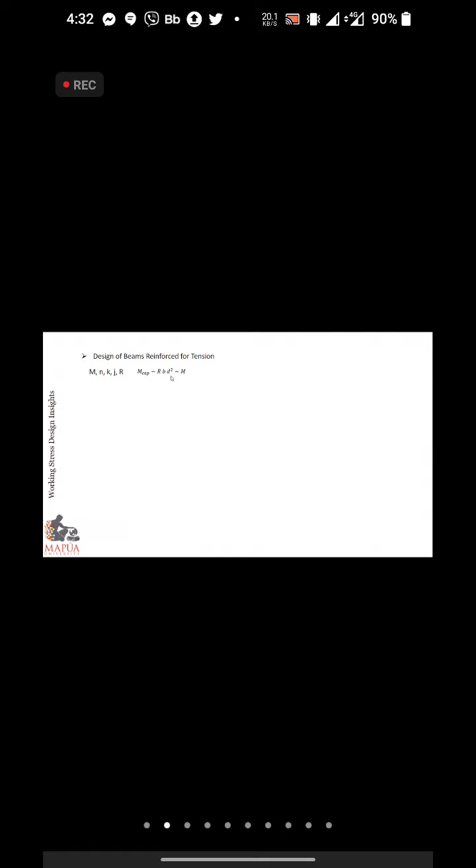Those laid out parameters can be computed as one single coefficient or constant R. And then we set a particular value for B as a function of D, or D as a function of B, with a guiding ideal ratio of 1/2 to 2/3.

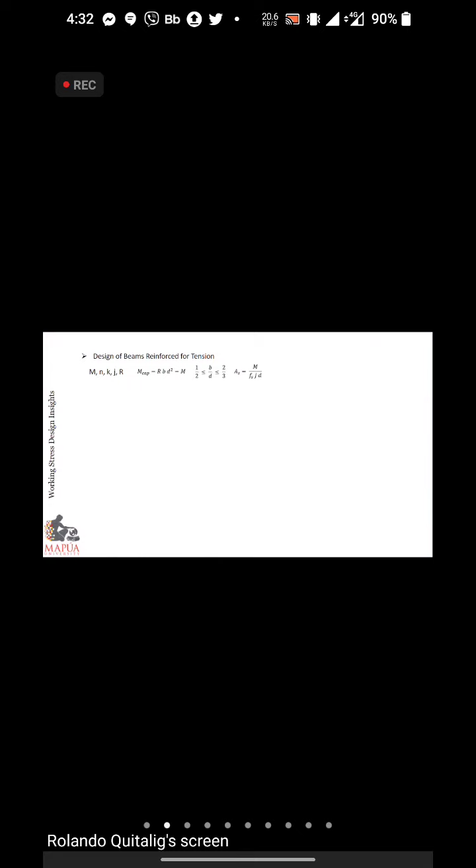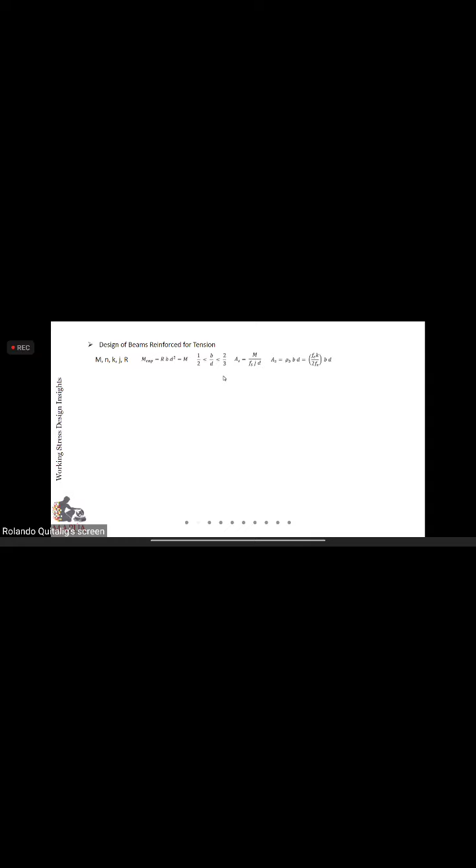Then after that, we compute for the AS, the tensile requirement for this design, singly reinforced, which is equal to M over FSJD. And then we can also obtain the magnitude considering the balance steel ratio multiplied by BD, that computed dimension. And as a function of the compressive strength of concrete, that would be FCK over 2FS BD.

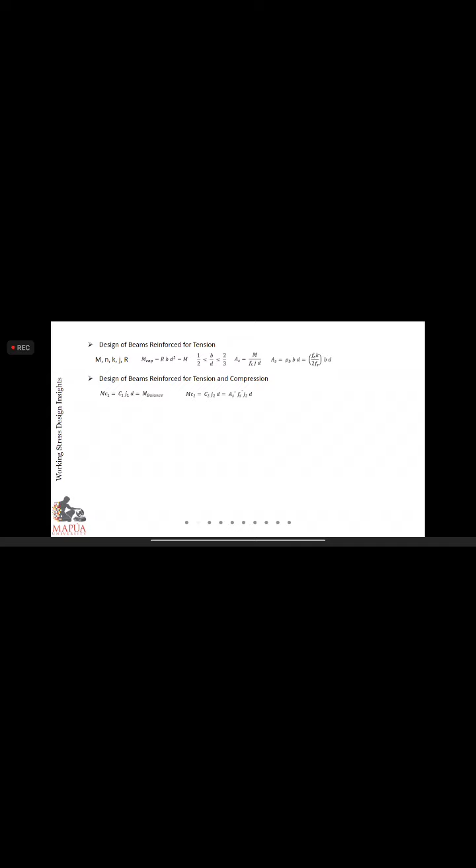And then if we are dealing with design of beams reinforced for tension and compression, we start with the balance moment, which is C1J1D as MC1, and C2J2D as MC2, or set as the compression bars. So that will be AS prime FS double prime for C2 and J2D.

We can compute for the excess moment by virtue of taking the difference of the service moment and the balance moment. We divide it by Fs double prime J2D. We know that there are conditions to be set in Fs double prime as a function of FCS prime, as actual compressive stress of the compression bars.

And then also for the tension area, we have MT1, AS1, FSJ1D as a balance moment. And then for AS2, FSJ2D will be set as MT2. Then the difference of the service moment and the balance moment is the excess moment to be imputed in the calculation of AS2, and this must be divided by FSJ2D.

And then the balance, I mean the AS1, can be computed based on this simple formula, M balance taken from this one, divided by the FSJ1D. And then we take the sum of these two AS, so we have this as total tension reinforcement needed at the tension area.

And then we decide the stirrups, the web reinforcement. In designing the stirrups, we need to find out the actual shear at the distance, and then we compute for the actual shear stress, and compare it with the allowable 0.09 square root of FC prime.

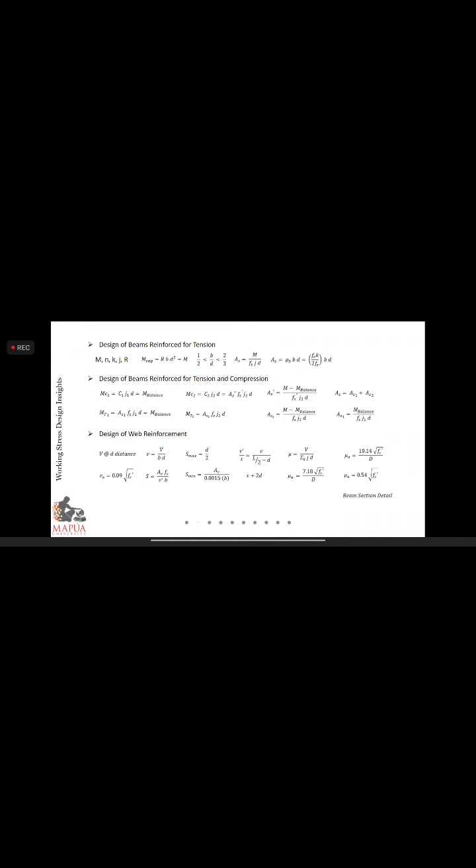We have this already, but I'd like to make an emphasis about the development length. With this development length, we can anchor the idea from the point of zero moment or the inflection point, where the concavity changes. So this will be the center line as indicated here.

From here, we have this set up, whichever is greatest among these three: D, 12 dB, or LN over 16. With this magnitude, we can say that this will be LD minus whatever governing value here, so there will be a magnitude right here.

In a similar manner, whether D or 12 dB, whichever is greater, we consider that and take the difference of it and the LD, then we have a magnitude for this one. From this point to this point to this point, we have a representation of that distance, and then we can compute for the point of zero moment.

By virtue of that magnitude, we can solve for the development length. We are also reminded that we can extend it about 6 inches if that would be continuous. If this terminates on both sides already and there is no continuity, there must be a 12 bend here, right here, and on the other side.

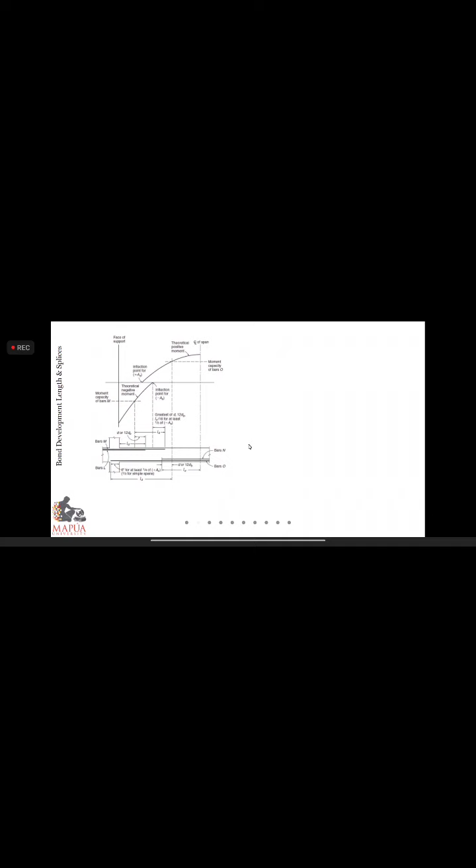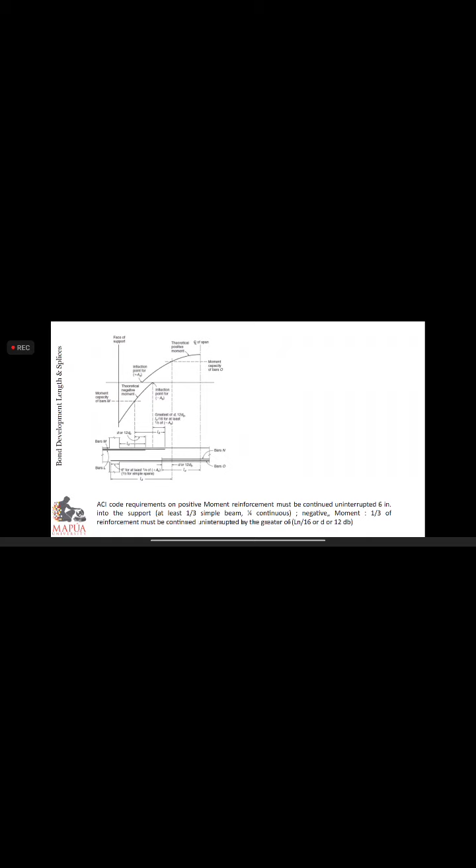This is per the ACI code requirements: positive moment reinforcement must be continued uninterrupted at least 6 inches into the support, at least one-third for simple beams, one-fourth for continuous. For negative moment, one-third of reinforcement must be continued uninterrupted by the greater of ln over 16, or the clear span over 16, or d, or 12 db. This has been manifested in this setup.

So for the development length, that includes the points of inflection and the center line here. I'd just like us to take as a learning discernment that the development length plays an important role in placing the main bars.

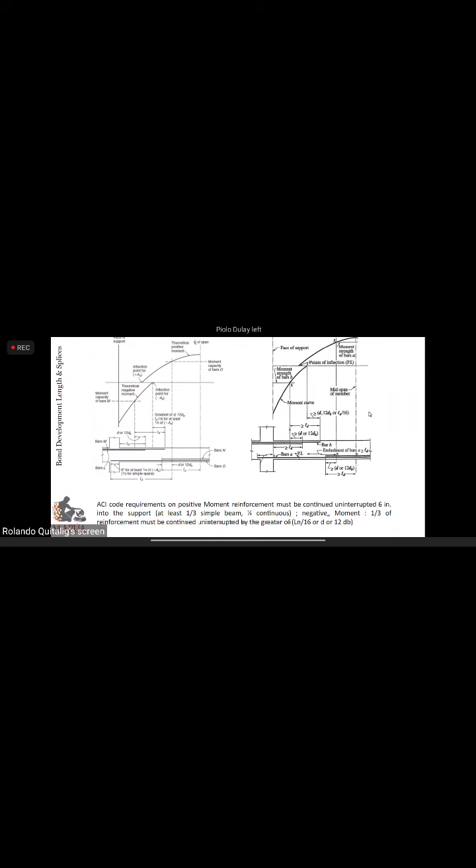Actually, this LD, among other development lengths, has been generalized as this one if you're dealing with continuous beams. So instead of considering the value for the development length, we can generally consider it as L1 over 4 for this first span. This will be over 3, and over 3 as well.

Meaning if you are dealing with an exterior support, that will be over 4. For interior supports, we are going to divide it by 3. So this will be the presentation or positioning of the main bars if you're dealing with negative moment, for the exterior and for the interior.

So the cutting list must be presented just like this one. And also for the positive moment being presented as extra bars, we can have this one. In a while, we are going to discuss to what extent we are going to cut the remaining extra bars. But at this point, let us understand first that this must be placed directly, it must be continued here.

So if, for example, you lack that particular length needed — you are dealing with a 7.5 meter length beam and the commercial size is 6 meters — well, you need to splice that accordingly, based on the recommended splice length of our National Structural Code.

Also, aside from using it continuously, you can employ a crank bar — you can bend it up accordingly. Based on the bending situation here, in this case, that is about 1/4 of the span here, and 1/7 of the span here for bending it up, if you want it to be continuous. As you notice here, there exists a splice length.

But the splice zone in the top bars must be somewhere here, because the induced loading is heavily carried by the tension bars here. So the splice zone is somewhere here and within this junction.

Please take note that in general we have this L/4 for exterior, and try to take a look at the bend here — that is about 12 db. There is also an embedment length here about 40 db to that consideration. So you already have 12 dB here, 40 dB here, and then you add the L/4. So that's the cutting length for this extra top bars at this support reaction, or for that consideration.

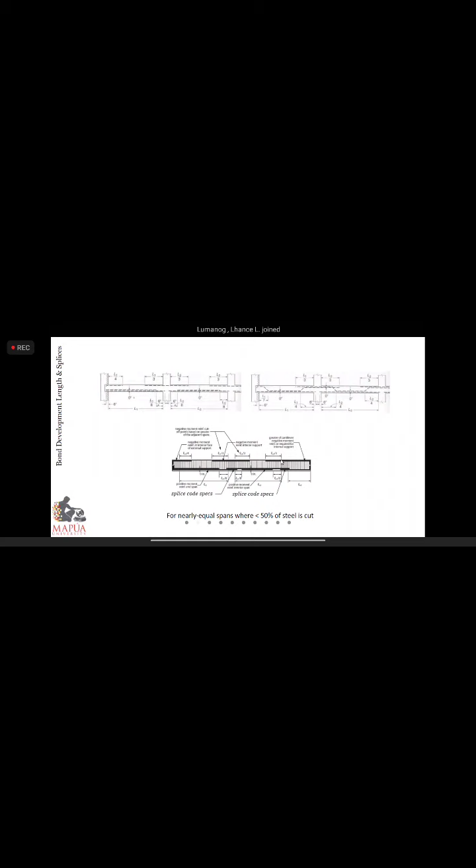And you take notice of the positioning of the stirrups here. The proximity of the stirrups is nearer within the area of the supports. And at the free end of the cantilever beam, you will notice that we have a bit of spacing on this one, in similar manner in here, and also in this mid span.

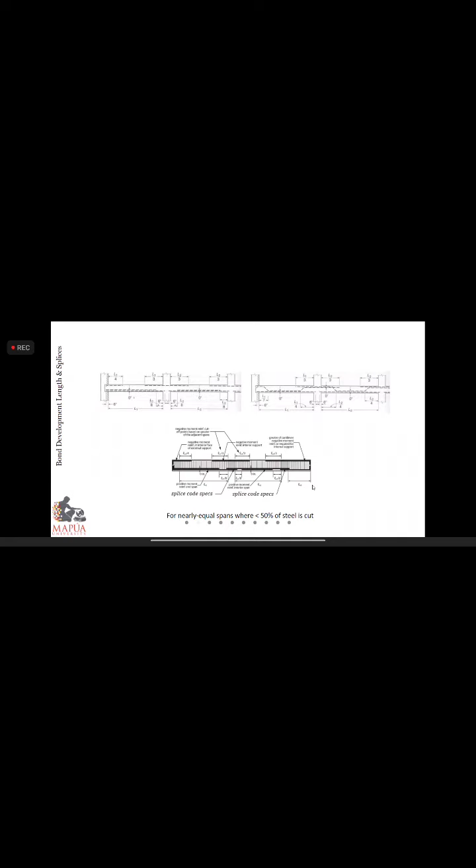Then we refer to the splicing length based on the recommending or governing code specification. The standard bend and cutoff points, approximate bend and cutoff points, can be used in continuous beams or in one-way slabs where the following conditions are satisfied: not more than half the reinforcement is bent or cut off; 2 or more spans; unit live load does not exceed 3 times unit dead load; loads are uniformly distributed; spans are approximately equal, with the larger of 2 adjacent spans not greater than the shorter by more than 20%. This will be the general presentation of it.

So continuous bend or crank, in essence.

Bond of reinforcing bars to the surrounding concrete influences the behavior of reinforced concrete structures in many ways. It can be a key element for the ultimate load carrying capacity of reinforced concrete structures, since it affects the anchorage of bars and the strength of lap splices.

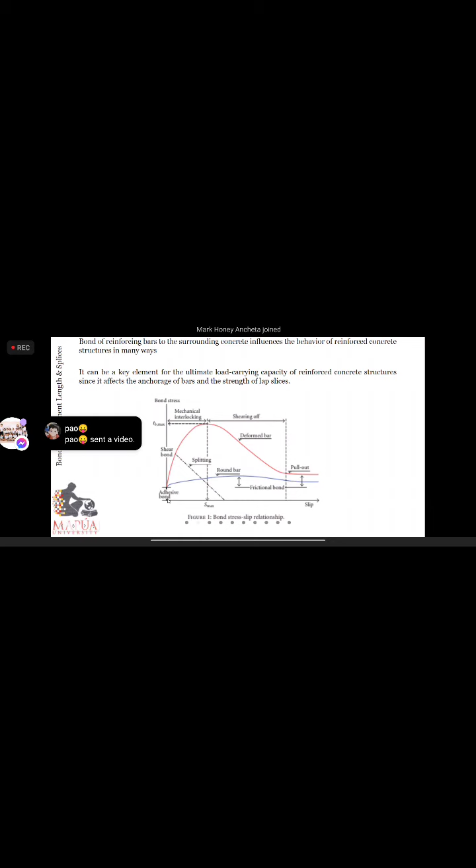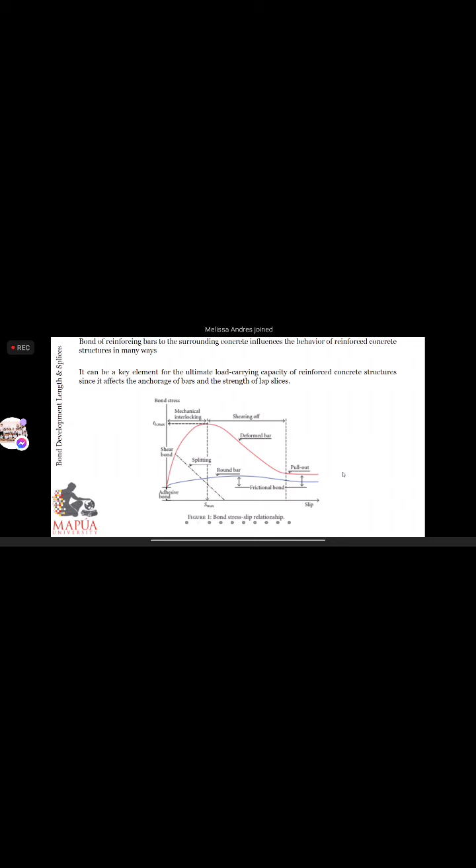As we take a look at the bond stress slip relationship here, take note of the three situations for the bond: the adhesive bond, the frictional bond, and the shear bond. Within this setup for types of bond actions, we have mechanical interlocking that depicts the highest peak of the bond stress. Beyond this area, it will be deformed accordingly and eventually pulled out. So that's the slip, in the exaggerated sense, of the reinforcing bars.

So in the natural extent, we are actually considering bond mechanical action that interlocks, and it provides the highest peak on that, meaning highest value or magnitude. Beyond this point, it will eventually be torn down or pulled down. This area is set as the shearing off area, while this one is the mechanical interlocking of the bond actions.

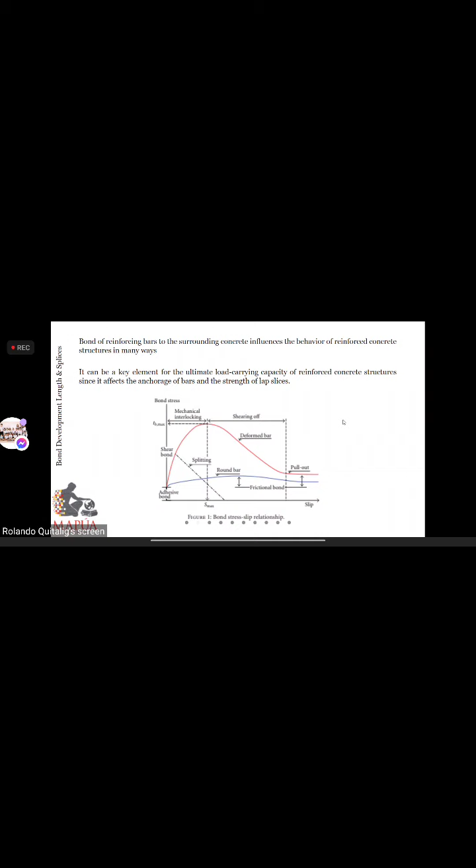Fellow learners, bond stress slip relationship. I presented this slide to you before we discussed, if you will remember, prior to the discussion of the working stress design, because I want you to condition your mind that this will be the output of what we are going to deal with, whether we are dealing with working stress design or the other principle.

So this will be the end result that we are going to employ, particularly in this type of structural element, beams. There will be hooks or bends set as 12 dB right here on the support reaction, and there will be embedment length set as development length. It can be 40 dB to 100 dB, and then you add that L over 3 there, so that's entirely the length cutting list for these top bars or extra top bars somewhere here.

And then for this one, it will be the consideration for cut-off length. If we set this as another 12 dB, and then L over 7. Or if the situation permits, you can also have it continuous without merely cutting the reinforcing bars.

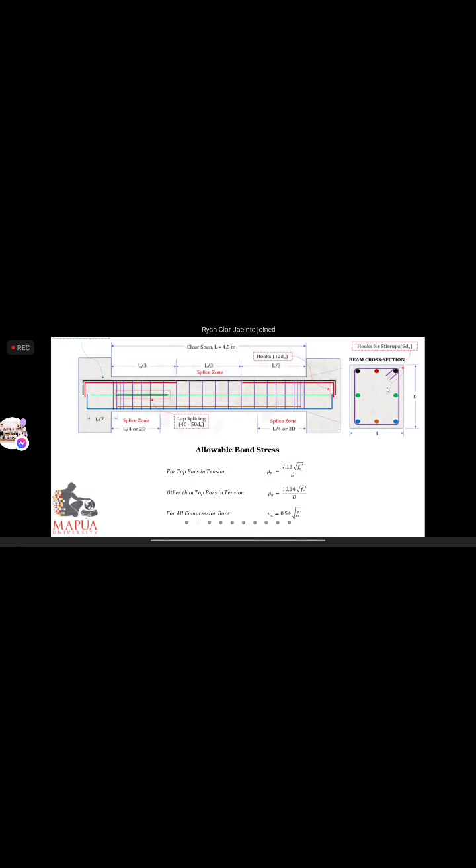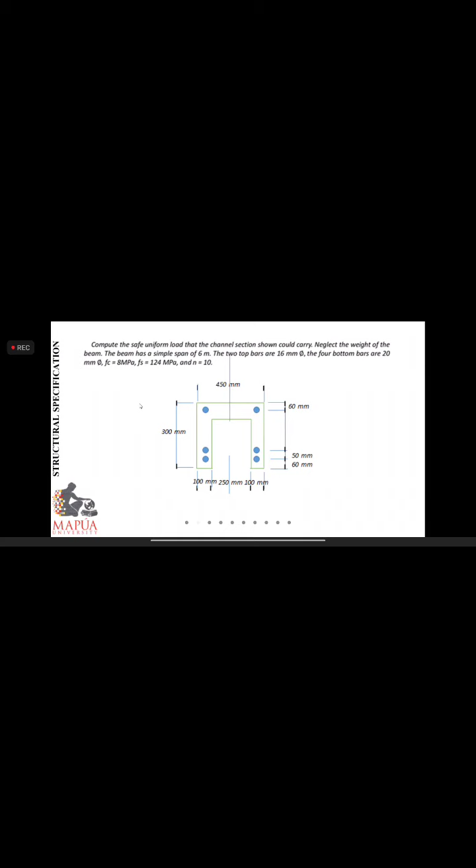By virtue of what we did in the first problem, we're going to compute for the location of the neutral axis, the magnitude of the moment of inertia, and the values of the moment capacity, then take the safest moment there. This moment capacity or safe moment will be compared to the actual service moment. So you are going to employ what you learned in structural analysis.

You are going to start first by computing the support reactions here, employing techniques that you learned in theory of structures. Once you know the support reactions, we are bound to draw the shear diagram and the moment diagram.